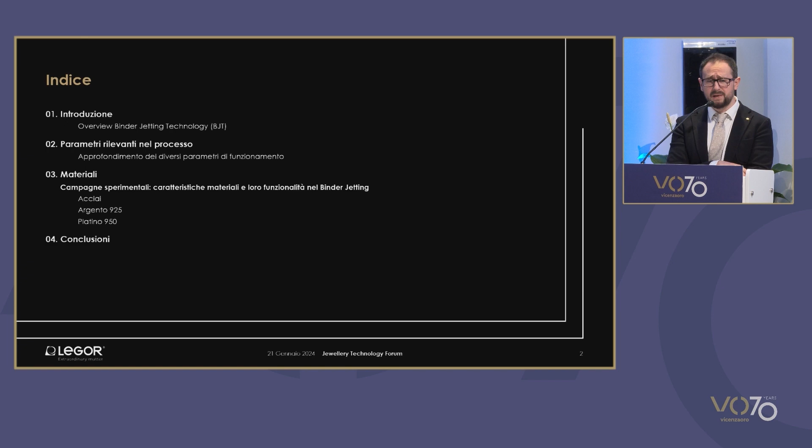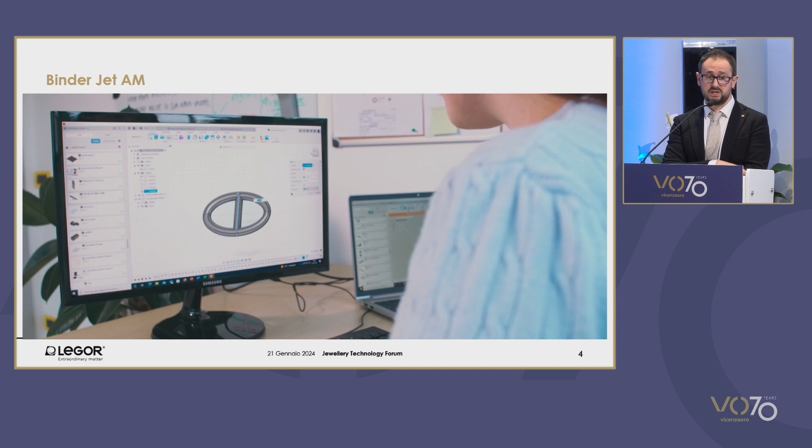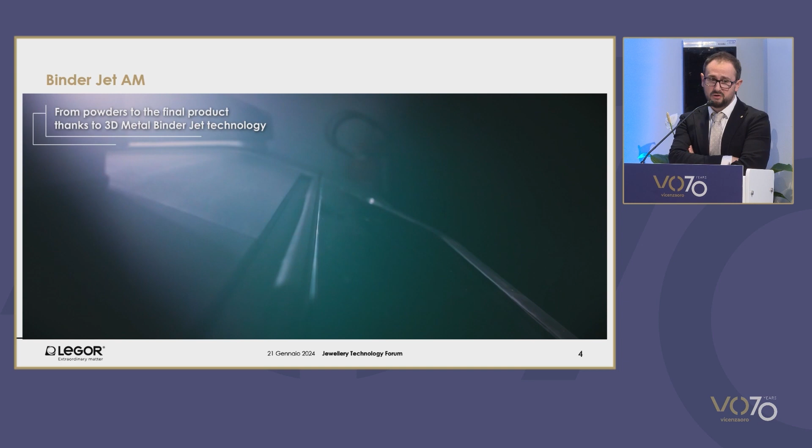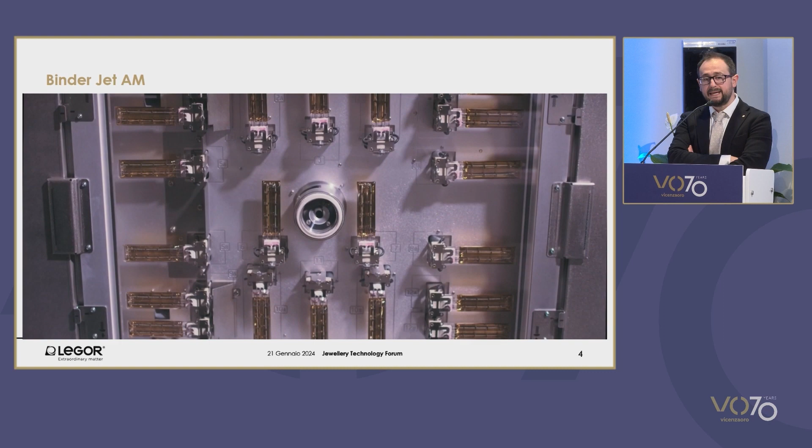I would like to start with a video that will quickly show you the process. It's additive manufacturing, so you start from a 3D drawing. We use file STEP that are downloaded through a software to allow for the appropriate sintering. The design feeds the printer that you can see here, and the powder is uploaded.

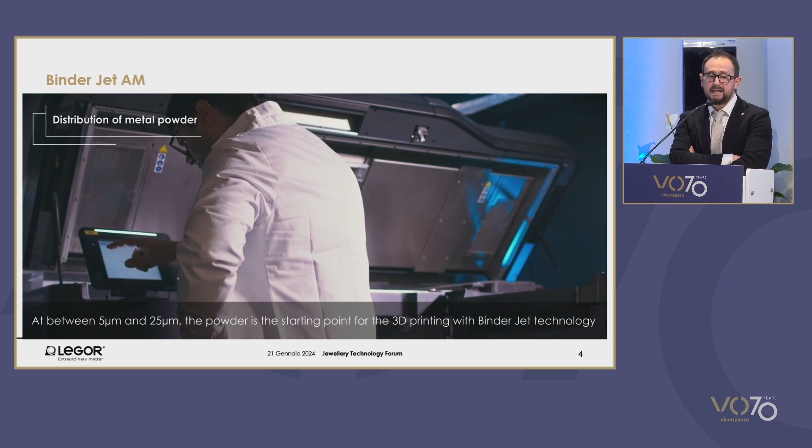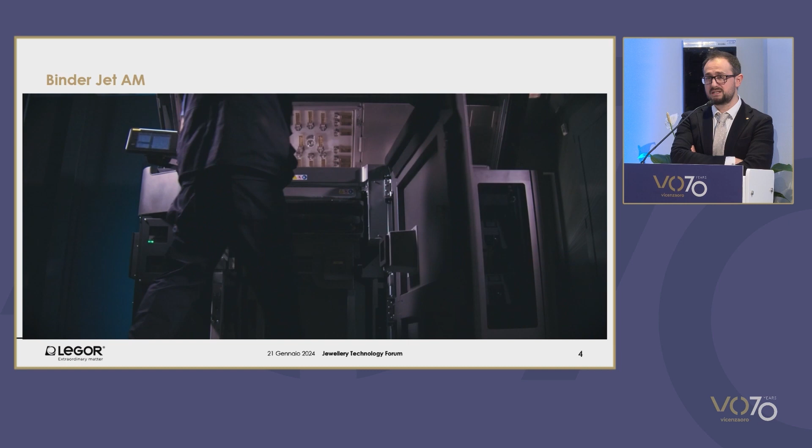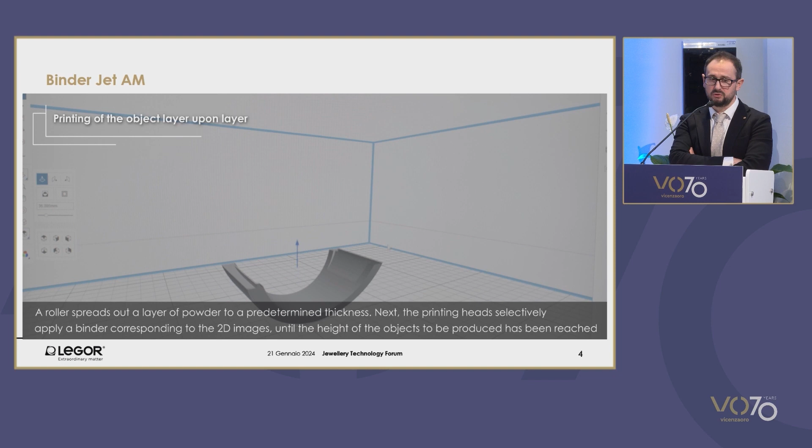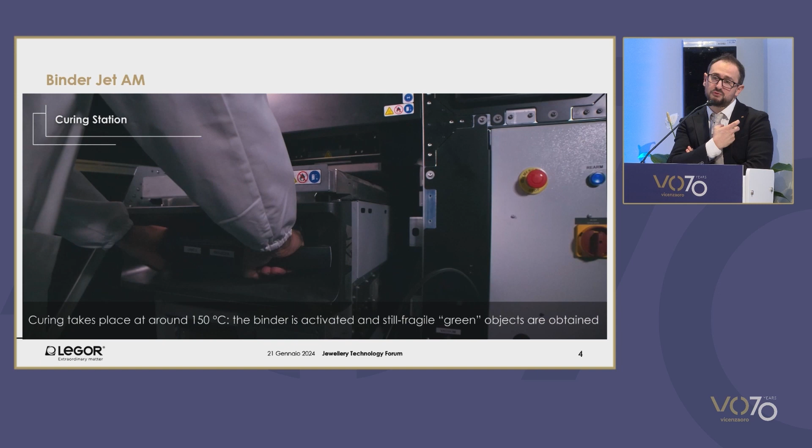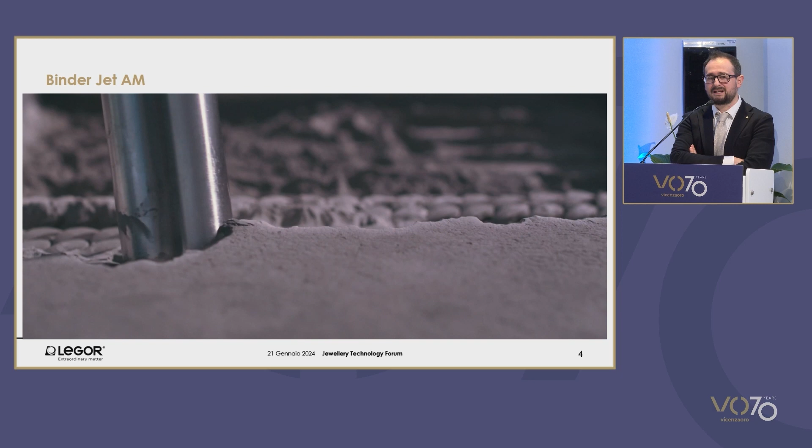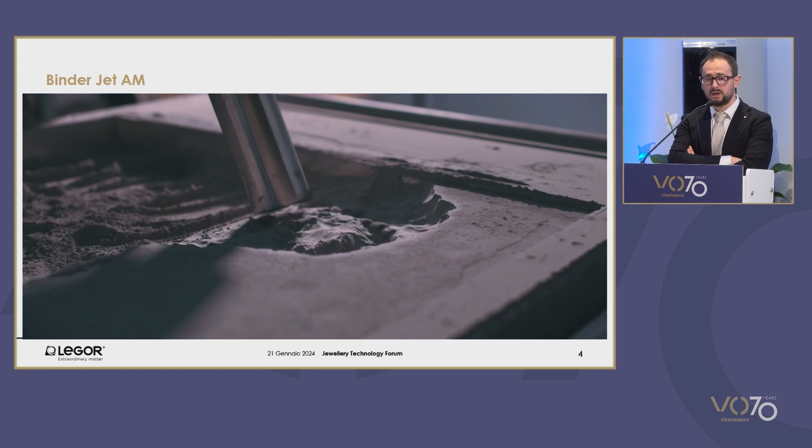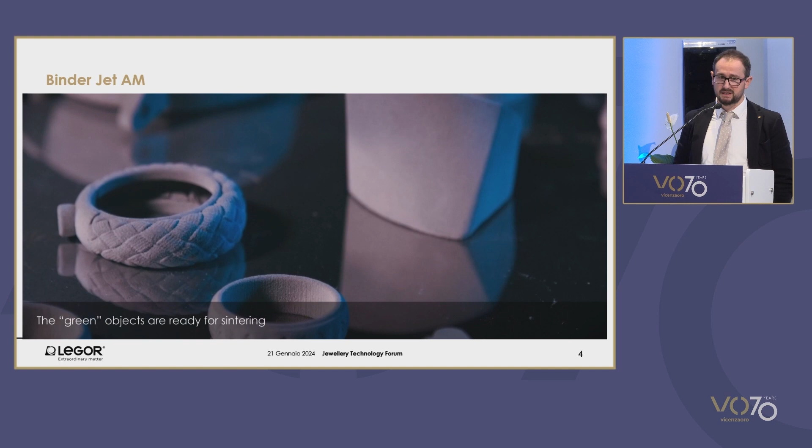The build unit is then cured. That is, the binder has to be treated to guarantee mechanical resistance. And then the pieces are extracted at the moment manually. After having been cured, they are sufficiently resistant to be manipulated. They're placed on trays and are then submitted to heat treatment to achieve the sintering process.

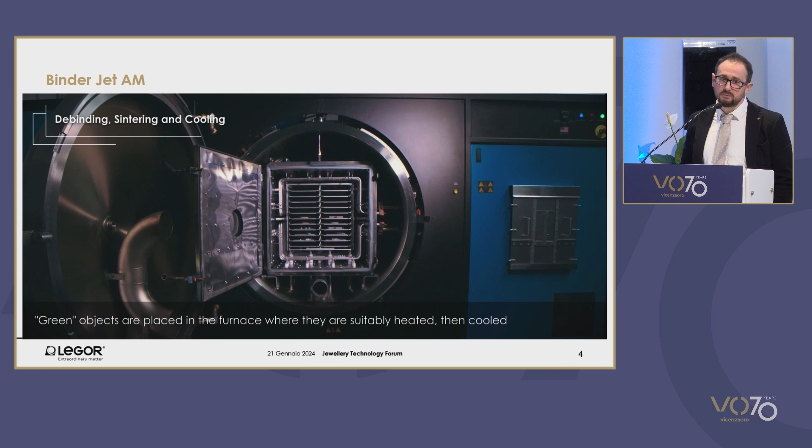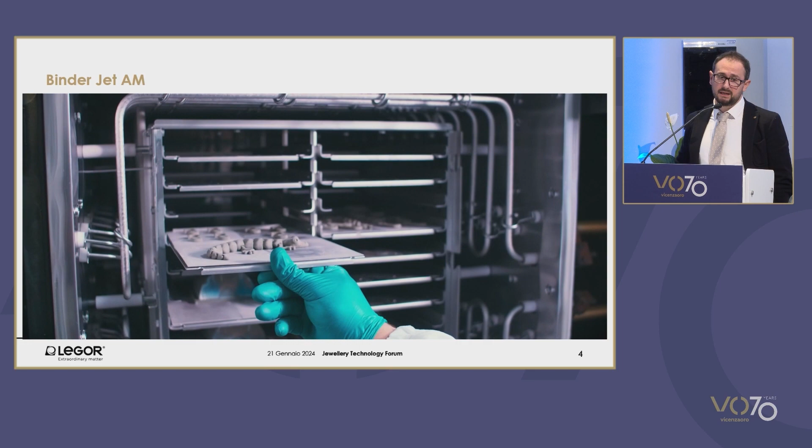The item is now ready to be placed in the oven. The oven is loaded with the trays, and the items will remain in this chamber, characterized by high thermal stability. So the heat cycle in every phase has a very low degree of variation in the different areas of the chamber. And this is fundamental to obtain dense, stable, and homogeneous items.

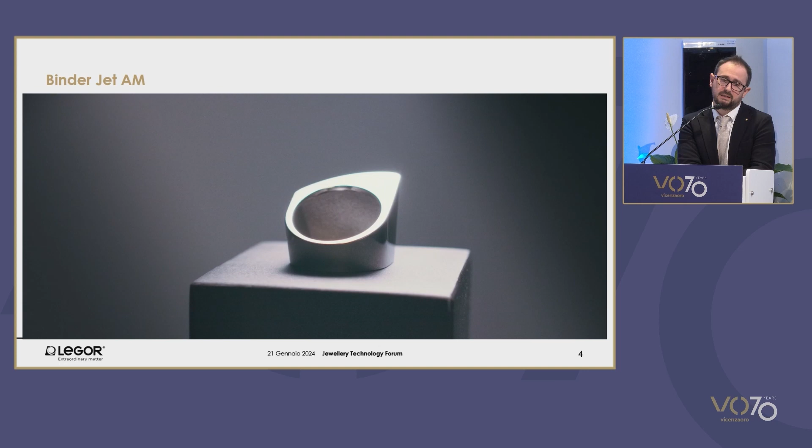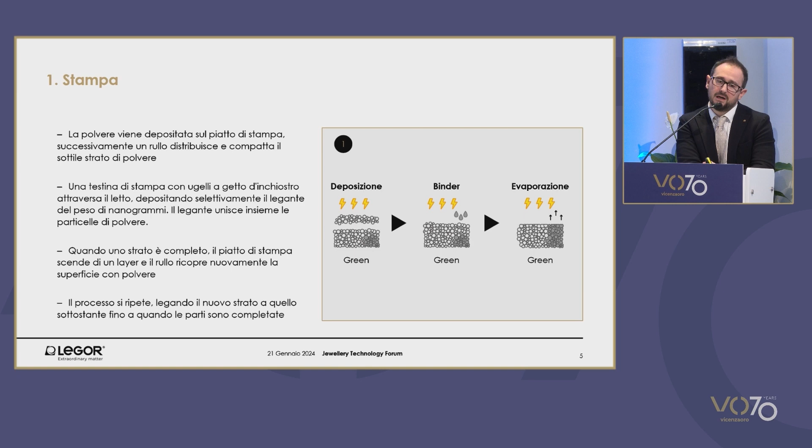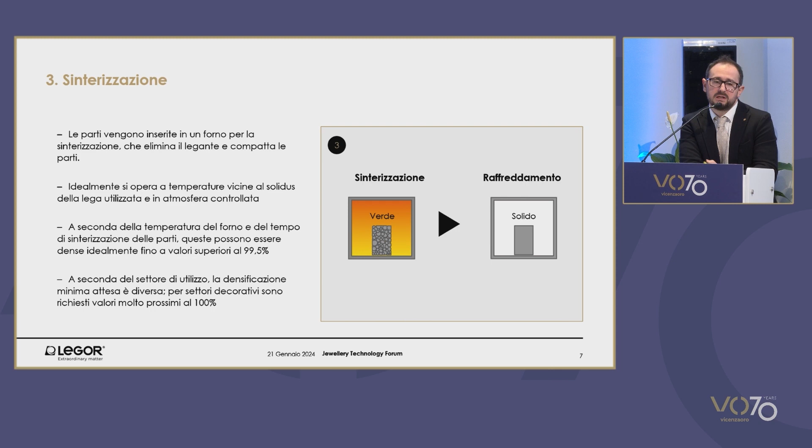So in one second, I've actually shown you how it works, even though I haven't told you anything about the process yet. These three slides simply summarize what I've just shown you: deposition of the powder, deposition of the binder in a selective way depending on the design of the item, where you need the structuring of the powder. Evaporation is a first phase to give mechanical resistance, which takes place directly in the printer. It's proprietary technology. Then the powder is cured, the item is extracted, and following sinterization, we have the cooling cycle.

Let's have a look at some of the most relevant parameters in the BJT process so that we can better understand how it works conceptually. We're talking about metals, therefore we start from an alloy. The type of alloy defines the characteristics of the material. And then we have some specific parameters of the process, such as the drawing, the design, the printing, the preparation for sintering, and sintering as such.

Initially, we wanted to include finishing, but that actually depends on the good success of sintering, so we do not have any specific aspects, maybe the roughness of the item immediately after sinterization, that we view as peculiar to this technology. So let's have a look at the critical parameters related to the alloy.

The heat characteristics of the alloy are fundamental because they define the sintering temperature. The type of alloy also defines the possibility of eutectic low melting phases that could compete with a medium-low temperature phase for the elimination of the binder. In a while I will show you some examples. And then, of course, the reactivity of the material defines the atmosphere within which I can work during the debinding and the sintering phase.

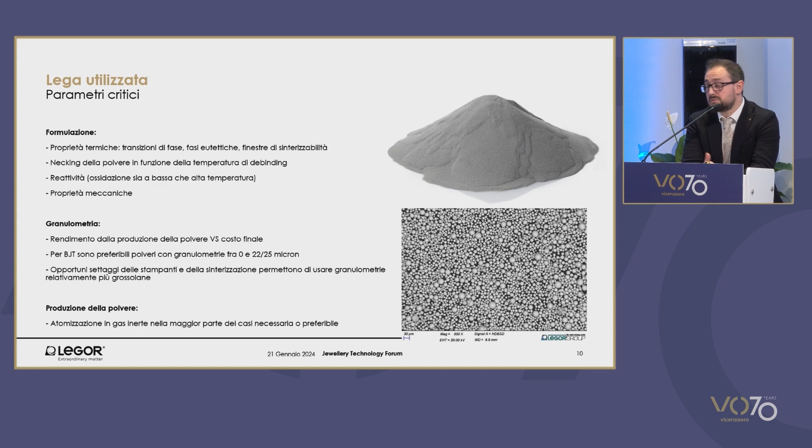There is a trade-off between the yield of the powder. We have perfectly controlled atomization phases, but I have to take into consideration a phase which would cost a lot if you're using precious material, and the optimum grain size, which according to the literature is very, very low in binder processes. So you need to select whenever possible an alloy that gives you a good production yield in terms of the powder, and the need, especially for jewelry and fashion, requiring a density equal or close to 1.

Design and drawing. One of the most important aspects of binder jet technology is that in all intermediate phases prior to sinterization, I have an aggregate of metal powder and binder. A polymeric binder that is used in a much smaller quantity compared to other additive technologies such as MIM. Here we have approximately 1% of the weight of the material.

I still have to consider the shrinkage in time due to the fact that my initial item has a certain size during the drawing and designing phase that must be bigger due to the fact that there is the binder as well. And the z-axis shows a product, an item, which is 15% larger when I'm printing it compared to the final item on the x, y plane and 17% on average on the z-axis, which is the axis on which the binder is deposited.

So if the object has been perfectly sinterized, these parameters are independent of the type of alloy. So the size monitoring in terms of size prior and after sintering in steel, platinum, and silver is an independent value, at least if we consider powders that have been atomized in inert gas. This is the ideal case, so once you decide the size, I can proceed with the production.

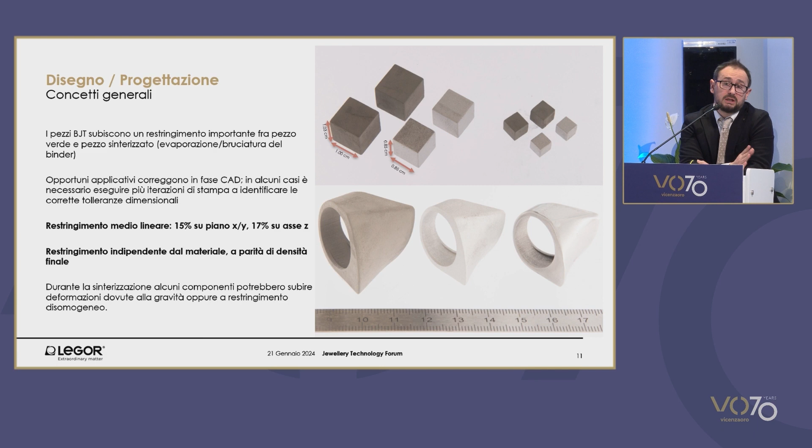But on top of that, you have to think about the possible softening of the piece and the presence of gravity, which plays a role also during sintering. This means that if the item has not been adequately placed in the sintering oven, it could be distorted by gravity, or the shrinkage in area close to parts that have a bigger mass could actually be strained in an irregular way, leading to undesired distortion.

To tackle this problem, during the design phase, it is possible to produce supports. You can see on the left the green and two sintered objects in steel, which during printing have been printed just as they were, without that brick that you can see here, which is made of alumina. The green one, in the green one, the powder supports the object while it is growing, so there is no mechanical issue here. But if I'm sintering the item, or when I'm sintering the item, unless I use a support, of course, you can place the brick also in a different way, but here it acts like a bridge.

And it shows the bridge that you see in the item on the right indicates the distortion caused by gravity. So the solution could be placing this brick and consider the tolerance of the object after sintering so that the object can be supported rather than caving in, and giving me the possibility to extract the brick after sintering.

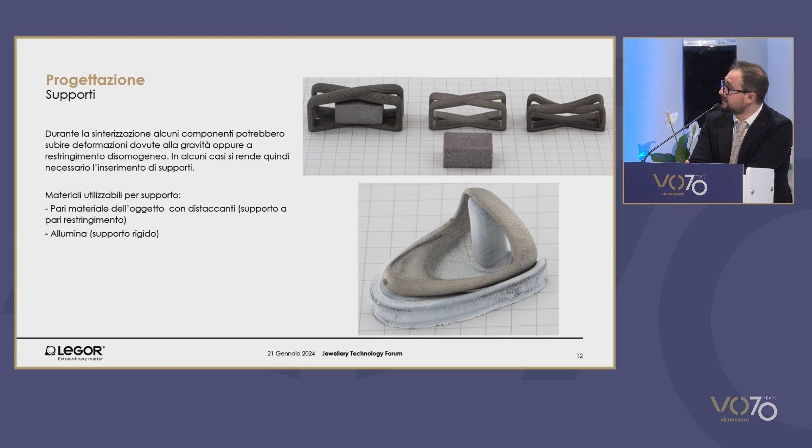So these are two amongst the many tricks that allow you to obtain complex forms, bearing in mind the thermal phase of the alloy.

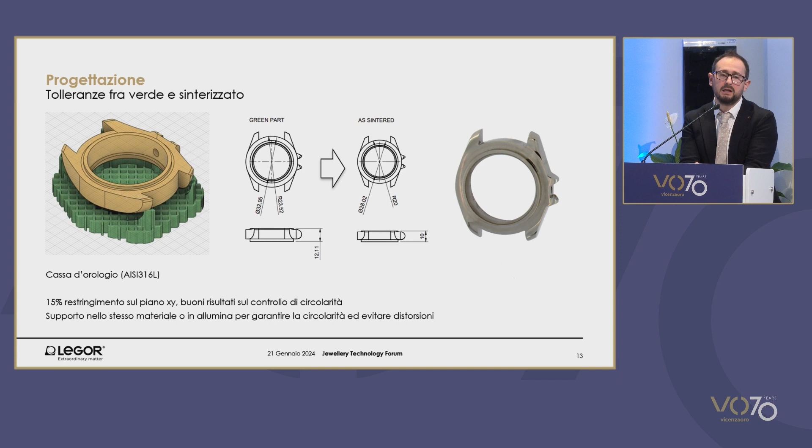On your left in green, you can see another support. This is for a watch box. This is AISI 316L. And in this way, we can guarantee excellent tolerance in terms of the circular shape of the item. The very same item produced without the support showed a distortion with a tapering between the base and the upper part of the object.

This is another example. Here you can see the different tolerances. We're talking about items with size base less than 8 times 8 centimeters and 7 centimeters in height. Possible tolerance range goes from 0.05 and 0.15 millimeters, depending on the geometry of the item and depending on all the other aspects.

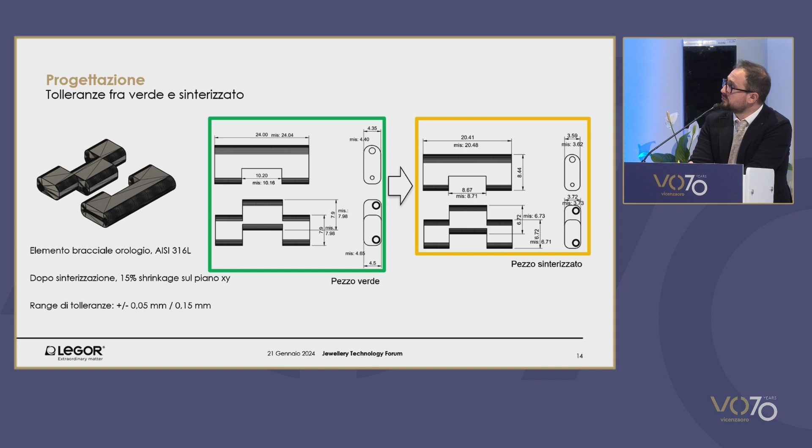The shrinkage on the XY planes can be stabilized, allowing us to achieve items with reasonable tolerances. These are links of a watch bracelet.

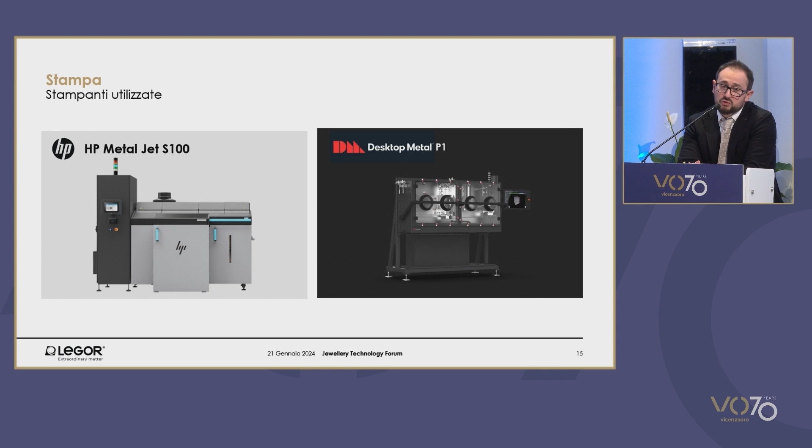The printing phase is the most important one. We have two systems in-house, an HP printer and a desktop metal printer. They have been chosen predominantly because of the size of their printing chamber. The HP machine has a printing volume which is pretty significant, about 19 liters. We can use significant quantities of powder suitable for series production. The HP printer was also the first one we started using with steel, non-precious metals, to explore the technology. When fully loaded, it can contain 200 kilograms of steel.

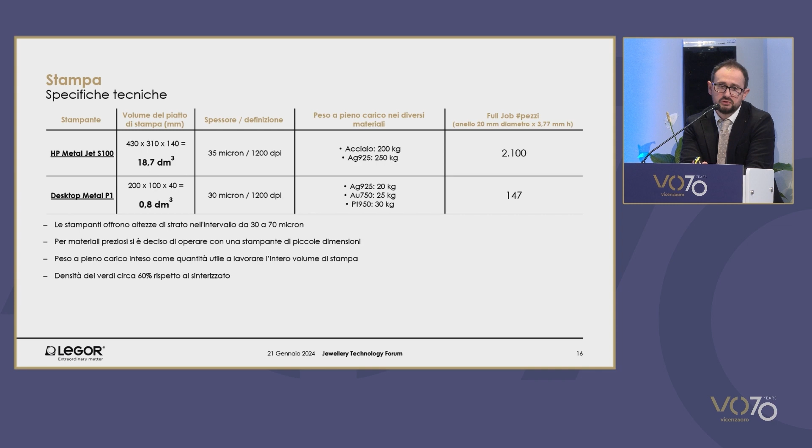You cannot think of processing, like we started last year, precious metals in such a big chamber, because of course you have to cover it all up on the Z-axis. So we decided to make use of another printer, which can contain about 1 liter. 20 by 10 by 4 centimeters is the printing capacity, and it allows us to work with approximately 30 kilograms of platinum powder.

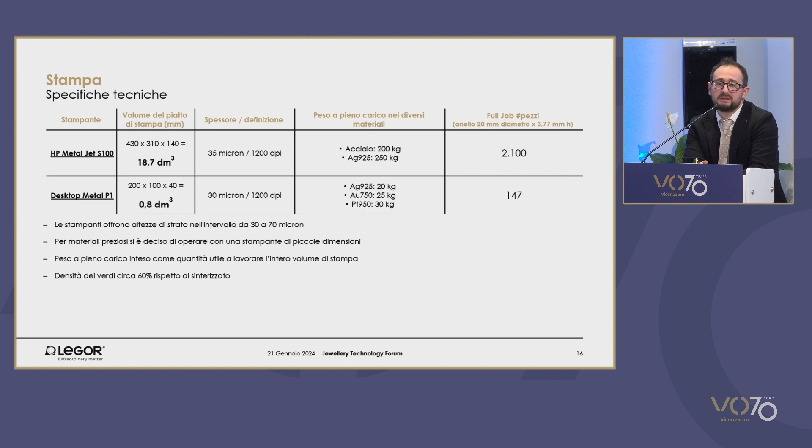Two similar technologies, each with its own peculiarities, that discriminate between the use of precious and non-precious metals. Our experience with the different printers tells us that depending on the type of material, the granulometry, and the printer we're using, it is necessary to have a learning curve, which is specific for that given setup.

After tests have been concluded, we can say that the printing phase is not the most complex one of the whole process, because the heat phase, the debinding and sintering phase, is much more surprising and has required many more iterations to achieve satisfactory results.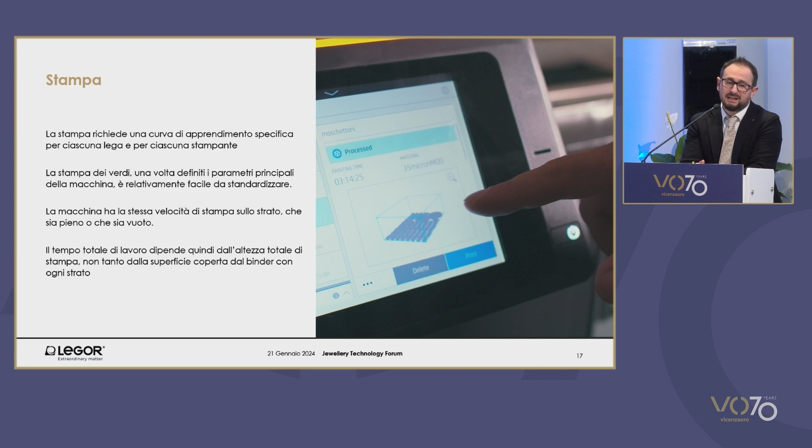The interesting aspect of the printing phase is that you compare it with SLM. In binder jet, the speed of printing depends on the speed with which the printing head or binder deposition head is moved, and this is independent of whether I have a punctiform object or have to cover the whole printing area. With SLM, the work on the layer is directly dependent on the number of pixels that I need to cover. So this actually favors binder jet printing, because it's much faster, at least during the printing phase. Printing time, therefore, depends on the total height of the item, not so much on the area of each slice.

It's interesting to focus on the layout of the items, making use of or opting for the plane of biggest encumbrance of the item to guarantee support in terms of gravity. Items have to be placed a few millimeters from one another, so you can actually fill the surface quite well. Trivial as it may sound, the higher the resolution, the better for the jewelry world.

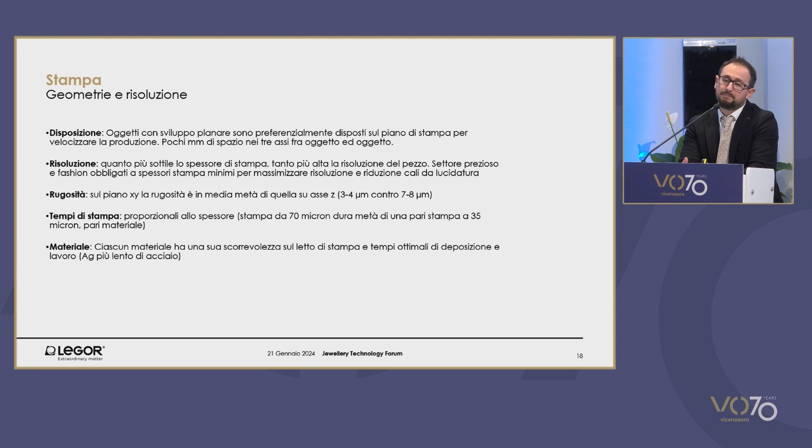With our powders, the roughness obtained at the end of the printing process is approximately 4 microns on the XY planes. It's higher on the Z-axis, about twice as much, and this depends, of course, on the binder elimination phase.

The binder is a polymeric compound owned by the companies selling printers, and it guarantees the innermost adhesion of the powder particles during all low temperature phases. So it allows me to decide what is going to become an item and what is going to be reusable powder. The powder that remains in the machine is immediately ready for a second printing cycle. And the resistance of the green item depends on the quantity of binder.

Hypothetically, I can also work with areas devoid of binder, because maybe they're protected by an outer shell, and the advantage is increased densification. The number one enemy of good densification is the possible presence of binder that has not been eliminated, that did not evaporate, that did not evacuate.

I have to guarantee a certain mechanical resistance, therefore mechanical strength. So for the processing phases, I have to be on the safe side, and I need to guarantee, thanks to the binder, for the whole section of the item, a minimal strength.

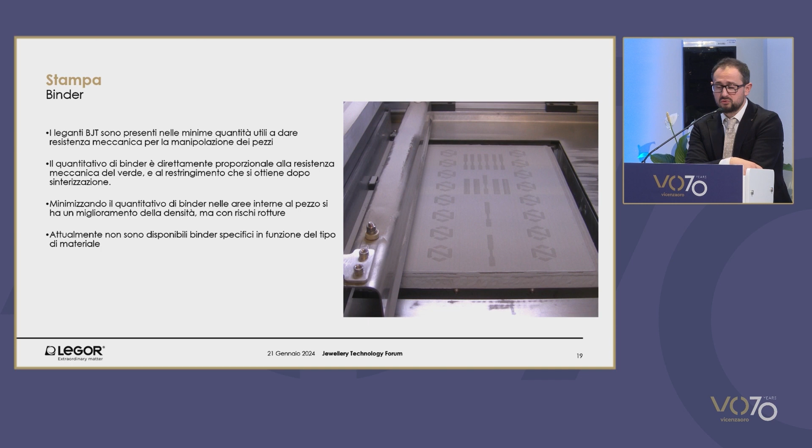One of the challenges we have today is that the binders present on the market boil down to essentially one binder, in the sense that they promise to develop binders depending on the temperature and on the material, but the ones that work best have been optimized for high temperatures. This leads to possible complexities for, say, copper-based materials or silver and gold materials.

The curing phase, which you saw before, during which the item is introduced in a chamber after being printed, envisages an intermediate temperature between 120 and 180 degrees for 3 to 5 hours, depending on the quantity of powder that has to be cured.

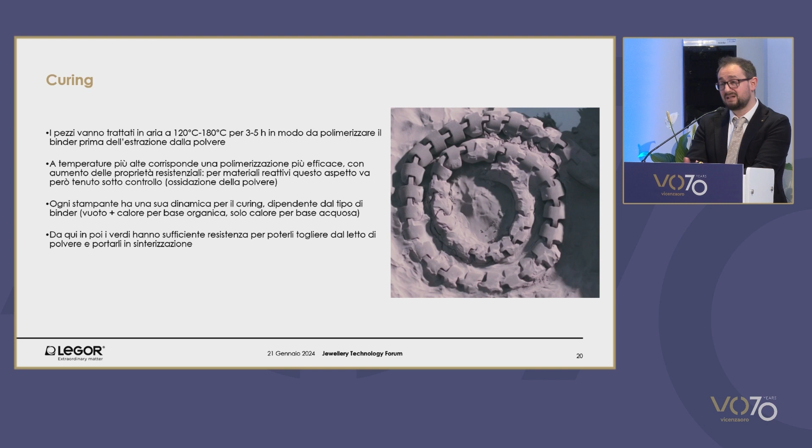It has to be borne in mind that some materials might be reactive. This is the case of silver and bronze. Therefore, the curing process for these metals, which is carried out in air, could lead to tarnishing, to oxidation, and oxidation may be detrimental to the sintering phase.

I don't want to bore you too much talking about sintering, but let's just remember that this process makes use of thermal energy, increased temperature, heat released into the system, so that a compound of non-aggregated powders kept together by the binder is transformed through adhesion between the different grains of powder. This process is called necking, and it starts at a much lower temperature compared to the actual melting of the material and the sintering temperature. But this is the beginning of the densification process.

So there are mechanisms of surface diffusion that allow us to obtain a meniscus which spreads then in the spaces in the powder, and then as the temperatures further increase, there are some mechanisms in the powder particle that allow for the approximation of the centers of the powder grains so that densification can occur, with the final target of achieving a residual porosity equal to zero, or very, very close to it, very low.

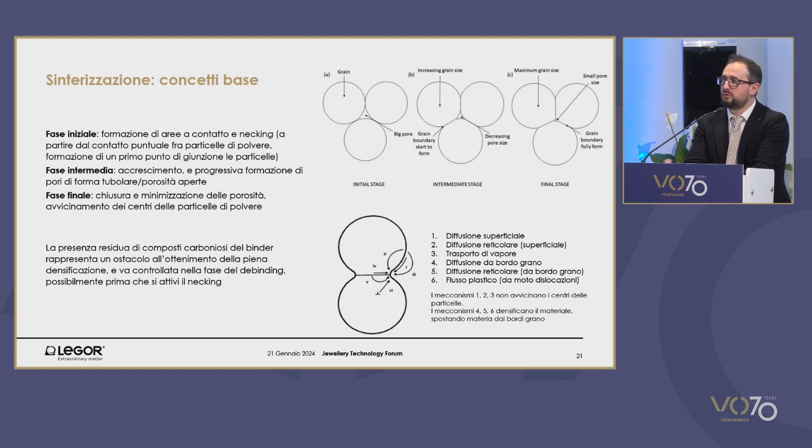That is, less than 0.5. For aesthetic purposes, 0.4, 0.3, bearing in mind the distribution of powders, because we're talking about an average value measured in a certain area. But of course, the dimension of some pores could be different. There may not be homogeneity.

So the two competing mechanisms in the debinding area, that is, the first part of the cycle at high temperature of the sintering process, derive from the fact that for some alloys, for some powders, the debinding process takes place at much lower temperatures compared to the beginning of powder aggregation.

This is the case of AISI 316L, where the necking temperature is 950 degrees, whereas the binder evacuation temperature, which lasts several hours and takes place at 400 degrees, is not competing against the first phase.

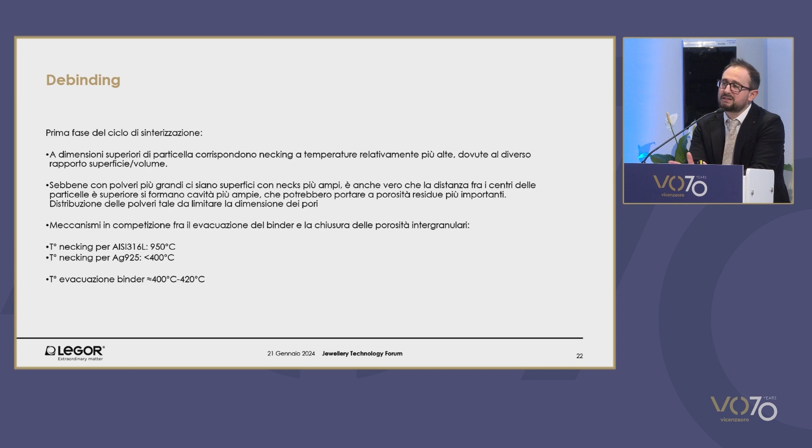For silver, these two mechanisms compete one against the other, because for silver, and this is our practical experience, necking starts much before the temperature of 400 degrees is achieved. So this prevents us from having a simple heat cycle without having to pay special attention to the different temperatures required.

So this is a problem that still has to be totally resolved, and that requires, or could at least be supported, by specific binders for low temperatures.

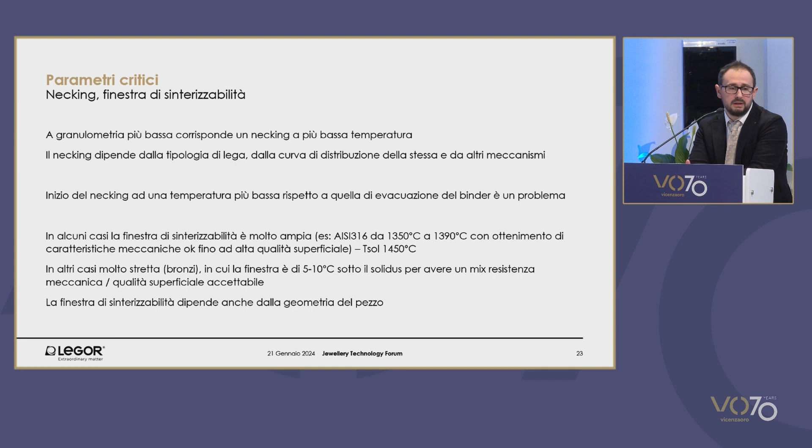On top of that, there are windows of excellent sinterizability that depend on the nature of the alloy. In some cases they're pretty wide, as is the case of steel. In other cases they're very narrow, for bronze for instance, for which the excellent sintering temperature window is very narrow, leading to undesirable results: in the lower part, I do not have good sintering and no mechanical resistance, and if I get very close to the solidus temperature, there is the risk of significant distortions.

After curing and debinding, the true sintering process starts. That envisages a specific atmosphere depending on the type of alloy, depending on the type of material.

Sintering ovens that are compatible for MIM, where the binder content is still pretty significant when the item is placed in the oven, envisage the use of reducing atmospheres with partial or total pressure hydrogen, or the possibility of insufflating during some parts of the cycle an inertizing gas like nitrogen.

For platinum, we have used an oven that uses air, since platinum has some highly desirable features: very high temperature resistance and very strong oxygen inertia. Therefore, that high temperature allows me to work easily and eliminate the binder.

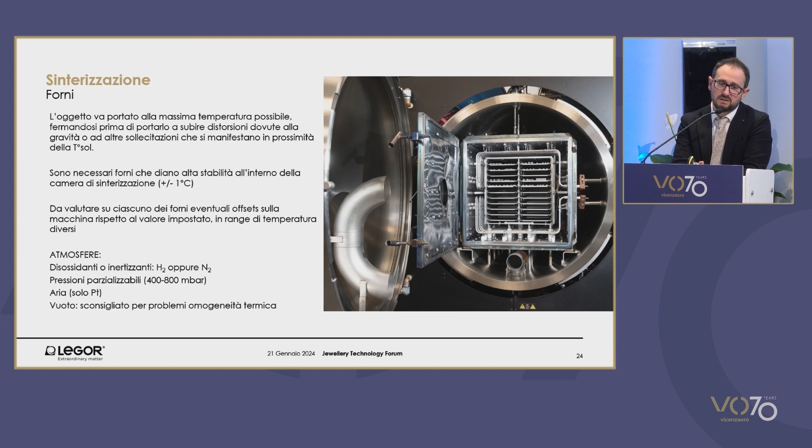Vacuum is not advised for sintering because it prevents heat homogeneity in the chamber, which is fundamental to guarantee that all items inside the chamber, on the different trays, are correctly heat treated.

This is the standard sintering cycle for stainless steel. We have phase one, the debinding, which has been extended significantly because of the shape of these items. This is similar to the cycle of microfusion with chalk; in the case of investment casting, we got wax, but here we got the binder, so it's a different thing. And then we have the curve that represents the sintering phase.

The phase of densification takes place in the upper part of the curve, at about 1400 degrees. If the item doesn't have any specific problems, the cooling curve can be the one you see here, and then fast cooling can continue.

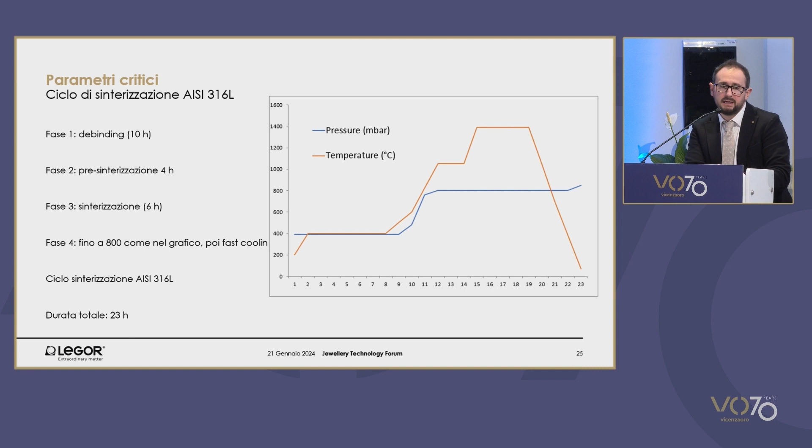So the cycle usually has a duration of 23 hours for steel. It is a pretty long cycle. Therefore, we usually take into consideration 48 hours because the printing phase has a duration of 2 to 4 hours. Then we have the curing phase and the sintering phase, usually carried out overnight, which are much more time-consuming.

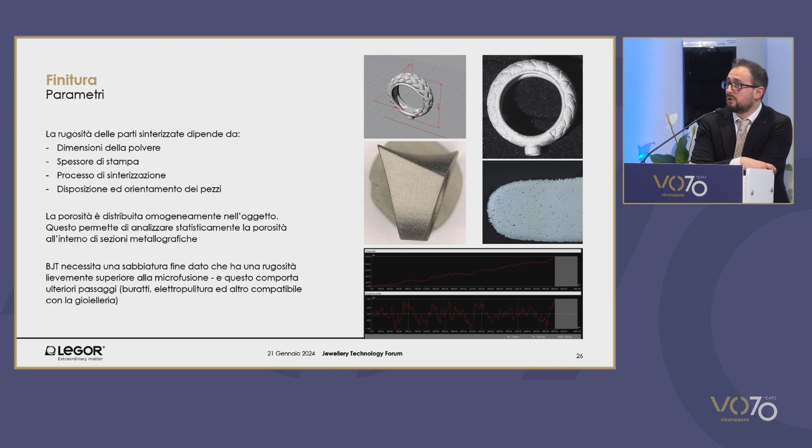Finishing. The binder jet technique deposits powder, and we can generally check the process by analyzing cross-sections. This gives us an idea of how well the item has been produced.

This is the list of the materials that we have treated. The first one was steel, AISI 316, with excellent results. We believe that this is now mature, and it has a pretty wide sintering window. Powder granulometry as initially suggested by the supplier - this steel has the characteristics that are desired.

The presence of nickel as such can be a limiting factor in some markets, but the softness and the mechanical resistance, which is not all that high, could actually play a role.

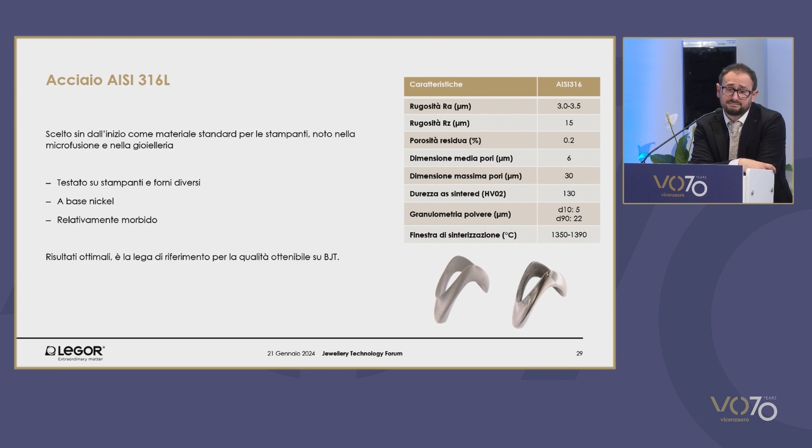We have also investigated steel panacea, which is a nickel-free, much harder steel used in fashion. It has been used, although it has very special characteristics in terms of the risk of obtaining, after sintering, precipitation in a ferritic phase with very low electrochemical resistance and significant issues of corrosion, which would mean worsening the aesthetic characteristics.

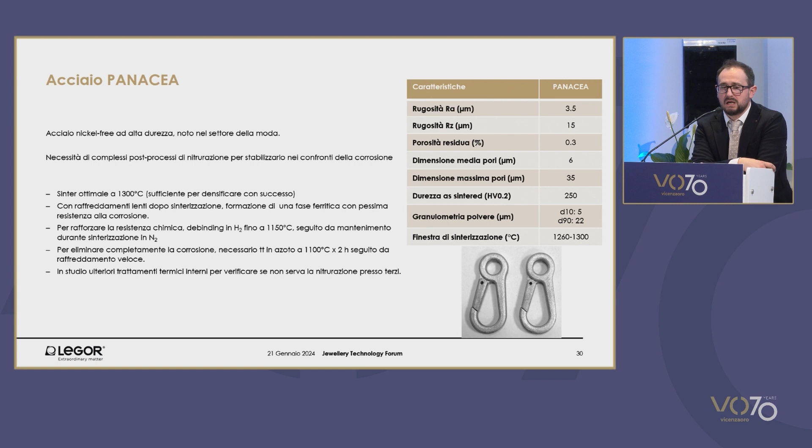The sintered item can be treated to sort out the problem of corrosion, 1,100 degrees for 2 hours in nitrogen. But of course this is costly because it has to be carried out in other companies. So we're now working on a treatment that can take place during the sintering phase through the insufflation of nitrogen. This has already significantly reduced the problem, although we cannot say the result is excellent yet.

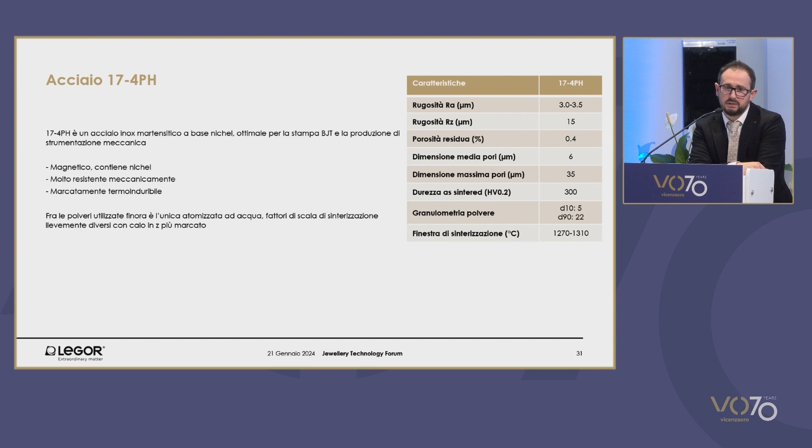We have also used a hard steel. It is a nickel-based steel, 17-4 PH. This has been our working bench for powders produced with water atomization. There were no problems during the printing phase, with the exception of a more marked shrinkage on the Z plane, something we still have to sort out.

Silver has been the first precious material we have worked on. So we started on the metal, beginning with sterling silver, but the eutectic phase, which is marked in the binary alloy, represented a problem for densification.

So this is why we changed the formulation to minimize the problem. And final residual porosity now is less than 1%. In some cases the result is much better than 0.9% residual porosity, but it still depends on the morphology of the item. So we still have to work on this alloy - we still have to fine-tune it to be able to say, yes, it perfectly meets the needs of the jewelry industry.

Another example - this has been easy from the very beginning. Platinum 950. Since last October we have started printing with this material, which is perfect from many viewpoints. Excellent heat resistance. The sintering phase does not cause any specific problems in terms of the heat level that needs to be reached.

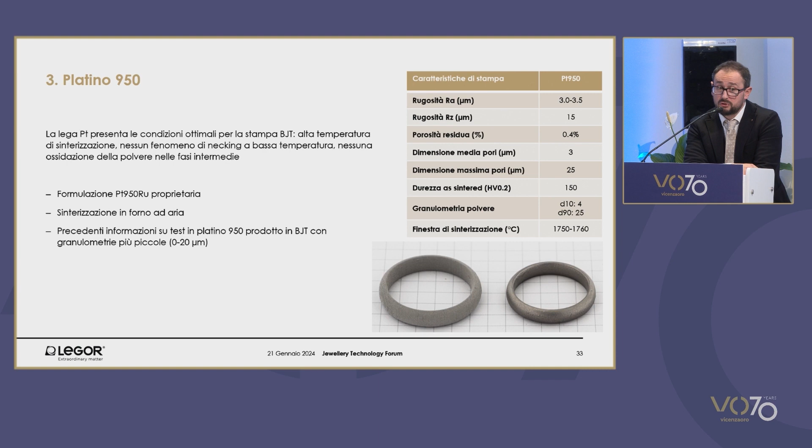So we can actually think about using this powder also to produce products to be sold on the market.

So to conclude, steel and platinum high melting alloys can be viewed as mature to be used for jewelry, watches, and fashion. They're stable, functional, and can be submitted to serial tests for later production of larger quantities with the MIM technology. So BJT is not an alternative to MIM, but the possibility of working without using a die costing thousands and thousands of euros is a good advantage.

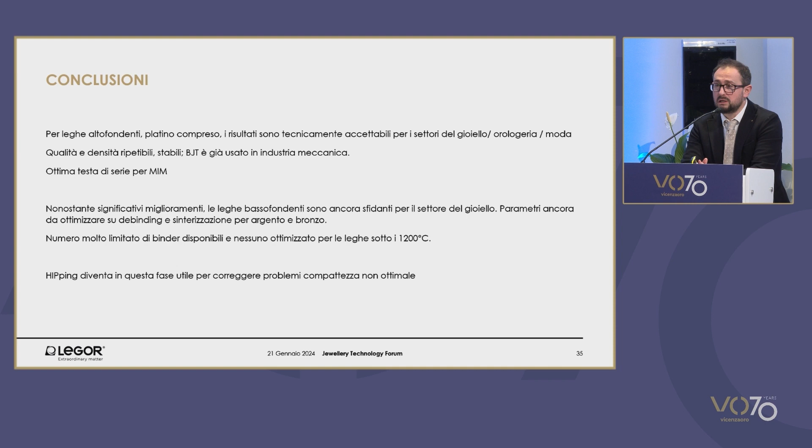The challenging side, however, is still related to alloys of gold and silver. For silver, we have made some progress, and this year we're going to study gold as well - we're going to investigate gold. So these are two aspects that will characterize our work in the new year. Our targets are making use of these powders with this technology and analyzing the technical features as we have done for the other alloys already.